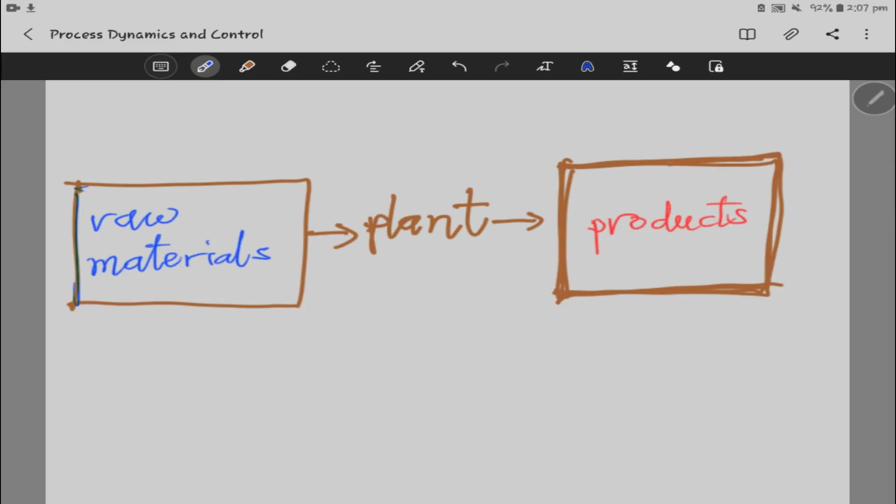A plant, not like plants like trees, but kind of like a factory or an industrial building - a facility that helps us convert these raw materials to products.

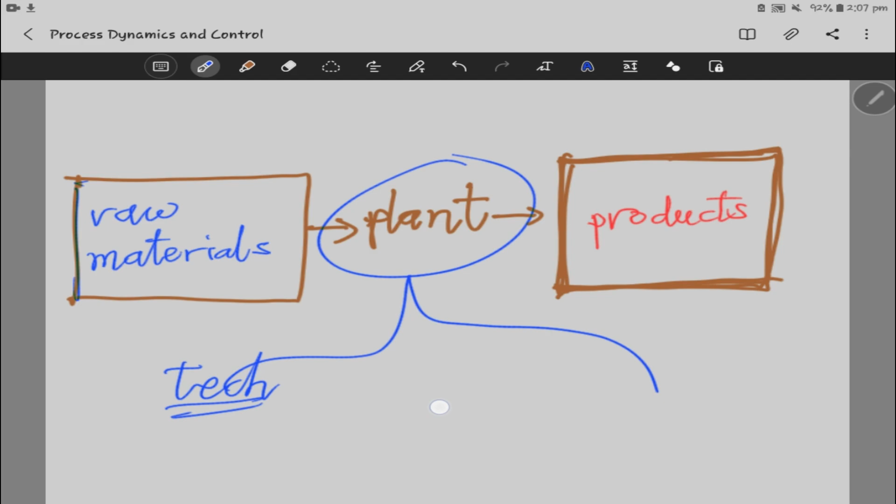These plants are limited by some things - some are technical, some are economical. On the technical aspect, you could have design specifications, safety, operational boundaries, a whole lot of conditions.

For the economical side, it is for the economical side - lots of constraints on the economical side. You just have to make sure that the energy you are using is readily available, and the raw materials you are using are also readily available. These are what we call the constraints for the plant.

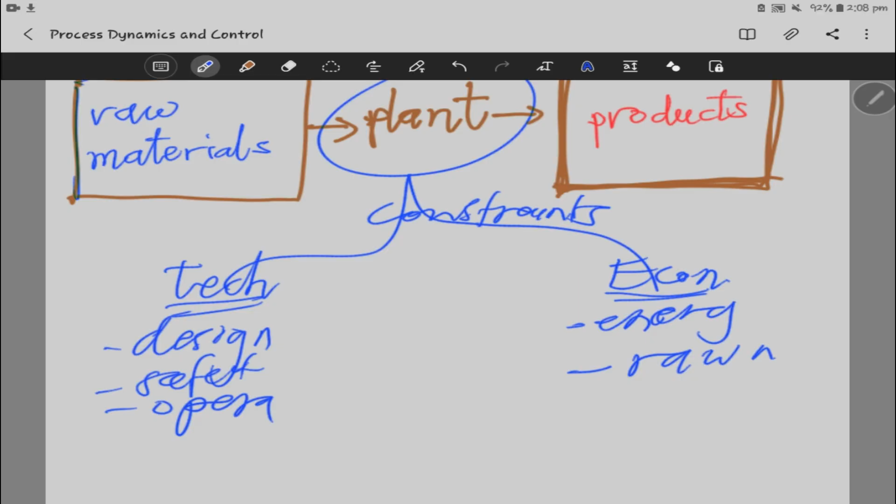When we are designing this plant, what happens if when we are trying to convert raw materials to product, we're not able to control it very well, and because we are not controlling the system, it ends up becoming unsafe. So the key word here is unsafe - that's why safety is a technical term.

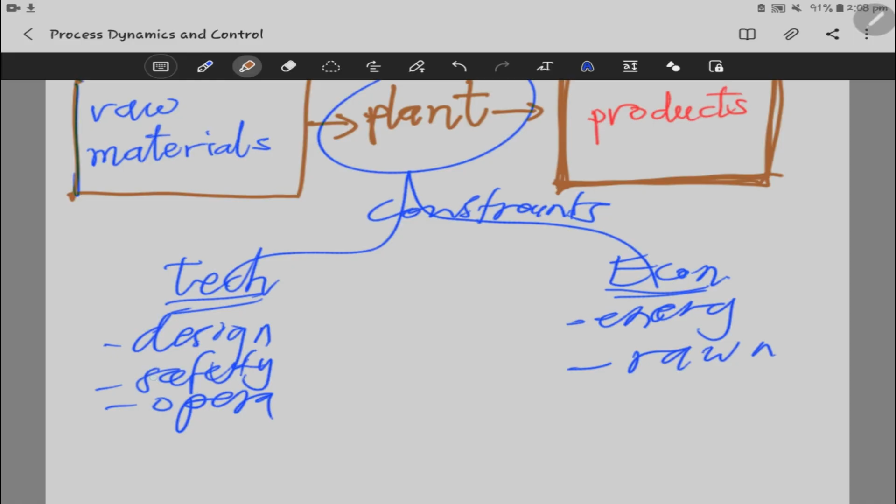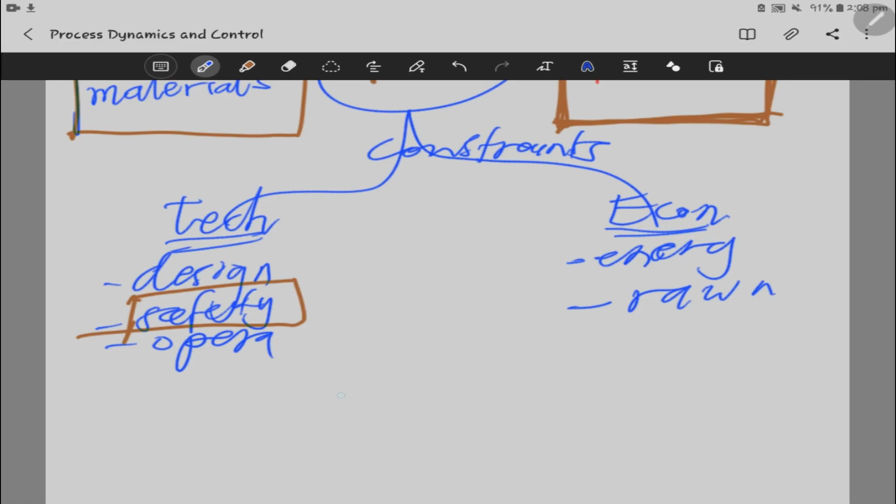When we talk about control systems, we are basically trying to make sure that the plant is one thing: safety. So now we introduce what we call a control system, just to make sure that we're able to produce our product.

This control system has three main objectives. In order for the plant to convert the raw materials to the product we are looking for, it has three main objectives. First of all, is to suppress any external factors, or disturbances.

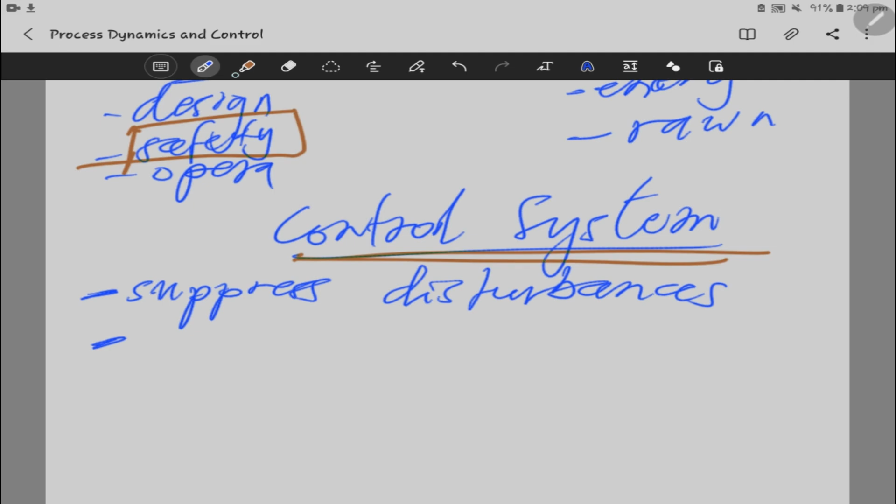Because when you are trying to convert raw materials to product, there are certain things that will try to disturb what you're trying to do. So when the system suppresses the disturbances, that's one thing the control system does.

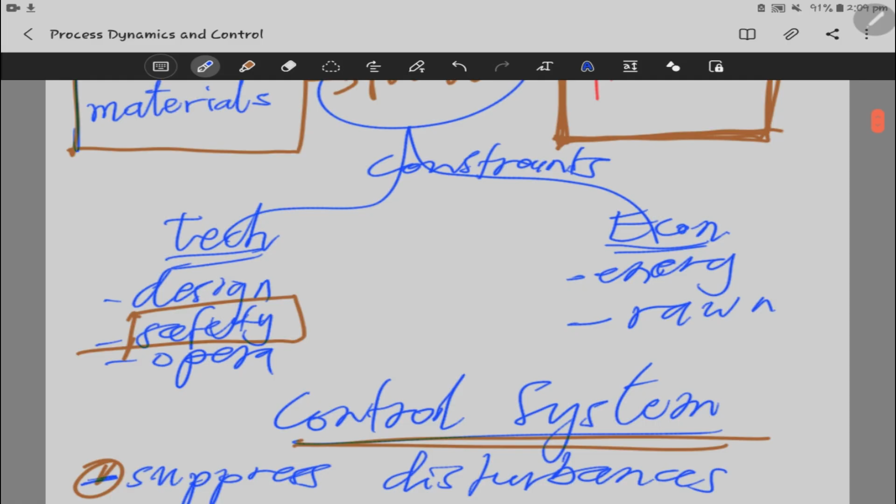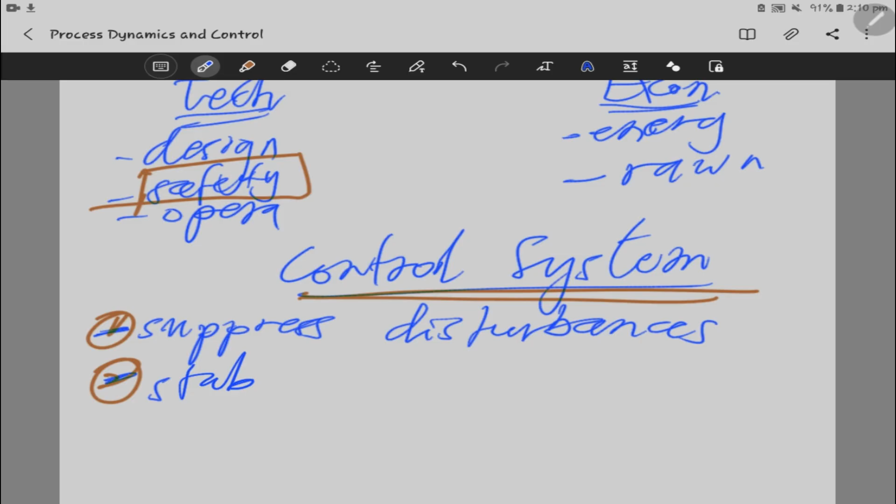Then the next thing it does is try to stabilize the chemical reaction, because most of the time, let's say here you're talking about chemical reactions. When converting the raw materials to product, you are taking the raw materials through a chemical reaction. So after we suppress the disturbances, the next thing will be to stabilize the chemical reaction that is trying to convert the raw materials to the product.

So when it stabilizes the chemical reaction - these are the three main objectives of a control system - the next thing to do is to make sure that the output is optimized.

So that we optimize the performance of the reaction, right? So that we get the product that we are looking for, right? So kind of like optimize this chemical reaction that we are talking about, right? Yeah. So these are the three main things, right?

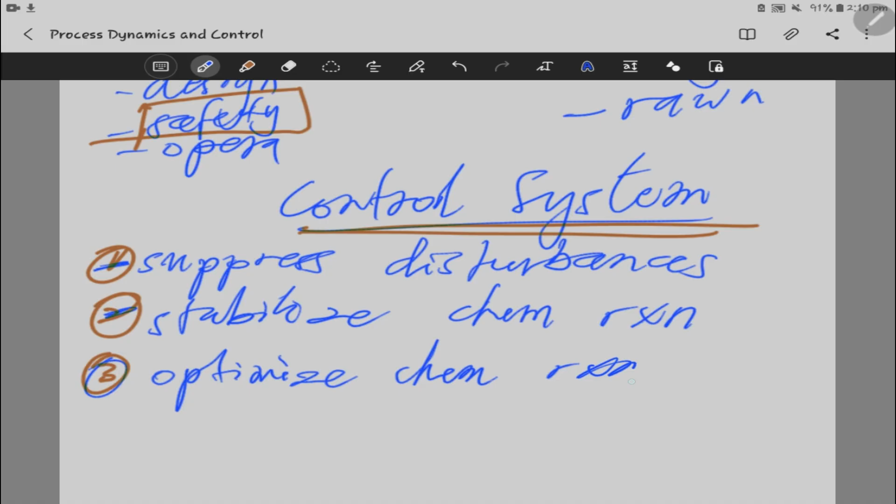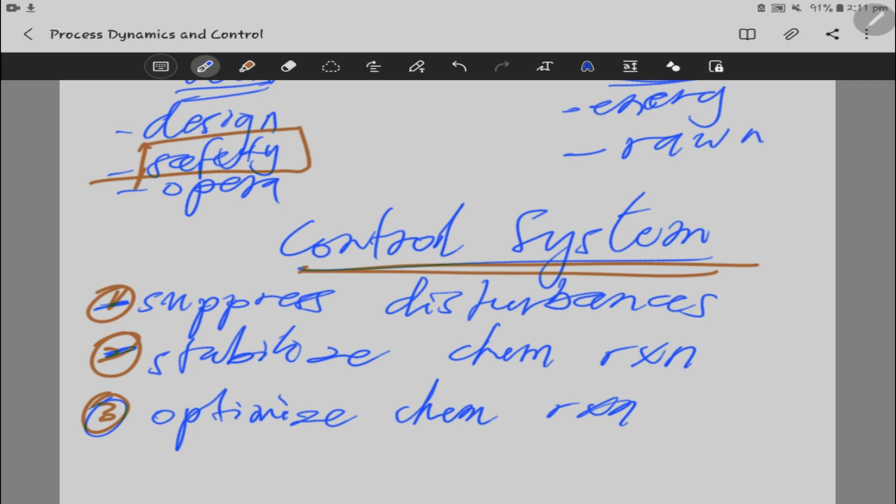And when we are doing all this, basically the control system is trying to achieve this when we are trying to convert the raw materials to the product, right? So someone will ask, what then is the control system? The control system is basically a setup that is built in such a way that you control how a particular system does what you want it to do.

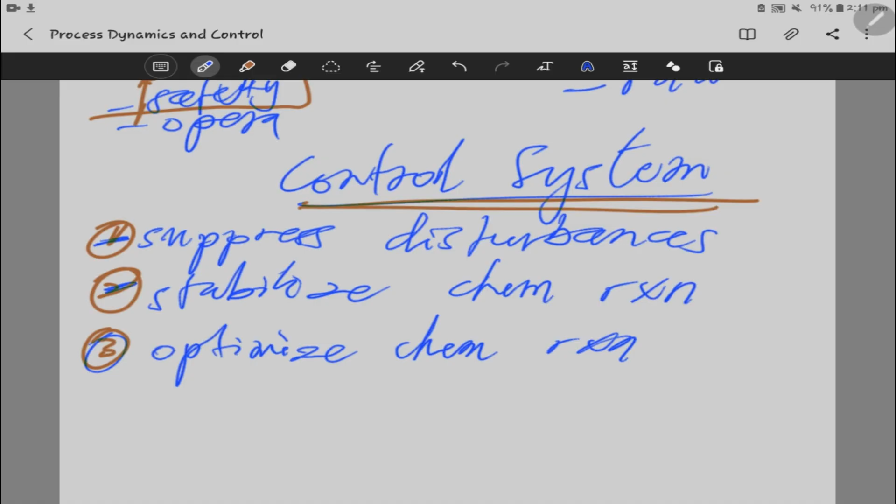And even if there are disturbances, it's able to control itself to the point that it still does what you want it to do. So that's basically what the control system is about.

All right. So here we have basically the simulation of a part of a whole system of a plant, right? What we're having here is the saponification reaction of sodium hydroxide and methyl acetate, right? And then we are expecting to have these products by the reaction: sodium acetate, and then we have methanol, right?

And within this whole process, there are a lot of things that we can control in order for us to get the product that we are looking for. So here, for instance, we can control the concentration of the sodium hydroxide, the concentration of the methyl acetate, and we can control the temperature of it, right?

So within this whole system, there are some things that we can control, others we do not control, we just measure. We can measure the temperature as well. And also we can control the flow rate of this sodium hydroxide. So these are the reactants that we have here. We can control how much of this is flowing, control the flow rate, using this, right?

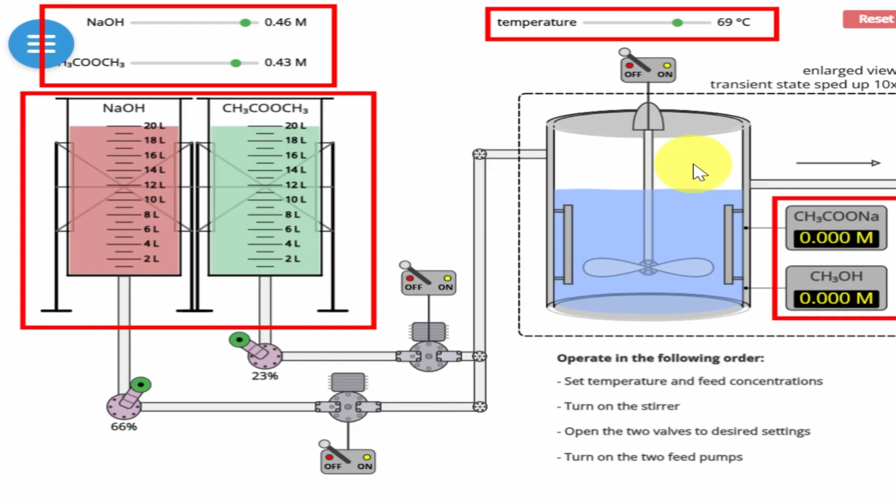And we also have pumps in order to make sure that the flow rate is constant, or for it to flow in a particular way, right? So this right here is just simulating a particular system. For instance, let's say we want this reaction to take place at 76 degrees Celsius, and then we set the concentration that we want, right?

And then we turn on the stirrer within this continuously stirred tank reactor. Turn it on, and now we've set the flow rate that we want for each of these reactants. Set these ones as well, and now we've turned on the pumps for them. So now they are flowing into the system, the reaction is taking place, and we can see that the concentration of the products are here.

So we can control a whole lot of things. Let's see, as we try to change the flow rate of the reactant, the concentrations of the products are changing, right? So this is just a system simulating the whole thing. So we are saying that it's important that we control systems like these so that we don't end up getting accidents, right?

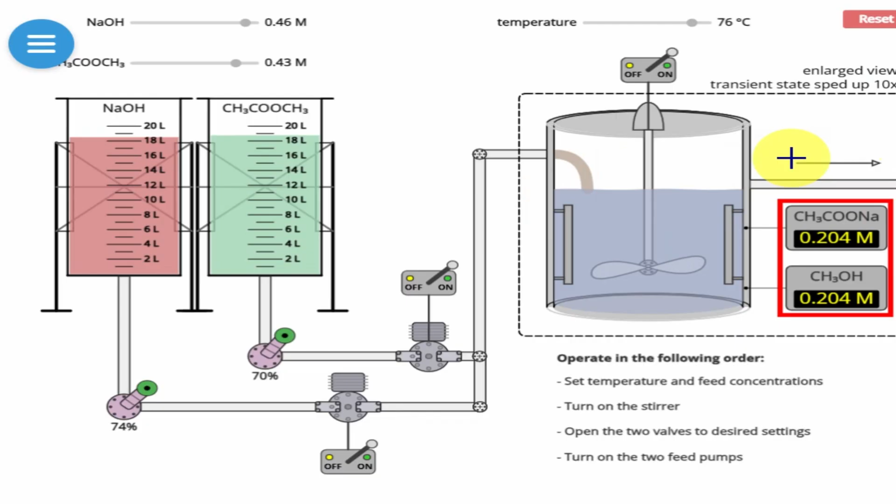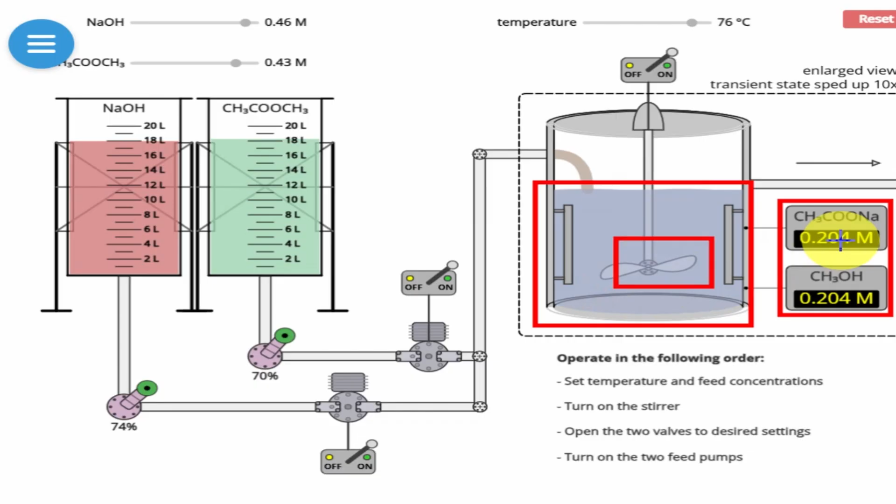So you see, even in this system here, the volume of the reactants within the tank, the height, is kept constant, right? And you can see that even the stirrer is moving at a particular speed. So a lot of things are controlled, some are kept constant, and some of them we don't control, we just measure.